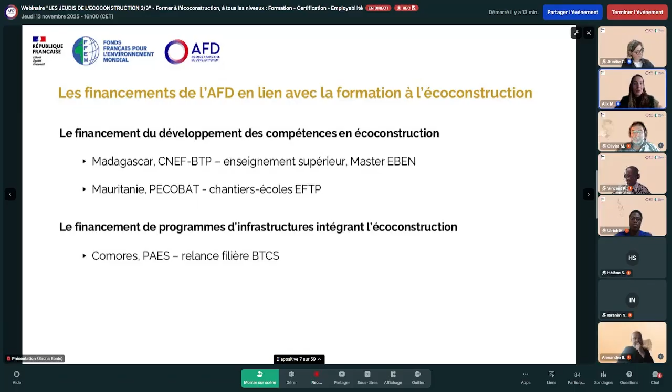Thank you so much, Alexandre, for clarifying AFD's initiatives. It really demonstrates that developing competent skills is essential to entering the employment market. This is the first theme of our roundtable, and we will try to respond to the question: what is the value of green building skills in the job market? To introduce this first session, I'd like to give the floor to Olivier Moles, who can share the French experience and what we can learn from it for other contexts.

Good morning, afternoon, evening, and thank you so much for the interest you have in this field and for inviting us on. For the last 46 years, the CRAterre Association has been working in tight collaboration with various research labs on sustainable building techniques by promoting earthen building techniques.

We've been developing sustainable building styles that are adaptable and valuable for climate change. We've been developing the techniques, training in them at every level, and also looking at developing the capacity to scientifically prove the value of this knowledge and then promote it to various actors in the sector.

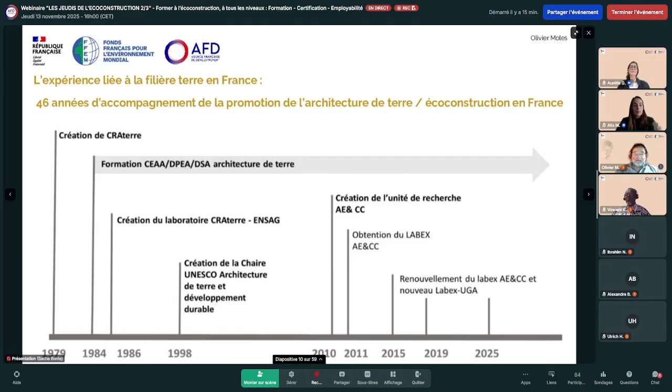So local architecture, and what's advantageous about local materials, is that it is knowledge that's actually the property of the local population. Those of us who have university degrees need to really adapt a learner's mind to these practices. Once we've learned about these techniques, we can think about how they might be used or reinterpreted, how complementary they are with new materials and new technology, and how to use the right material, the right knowledge, in the right place.

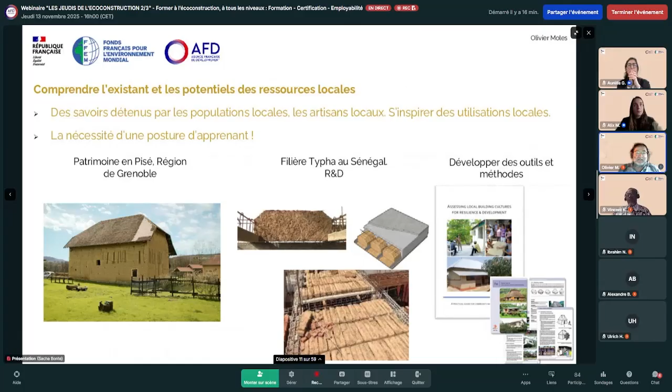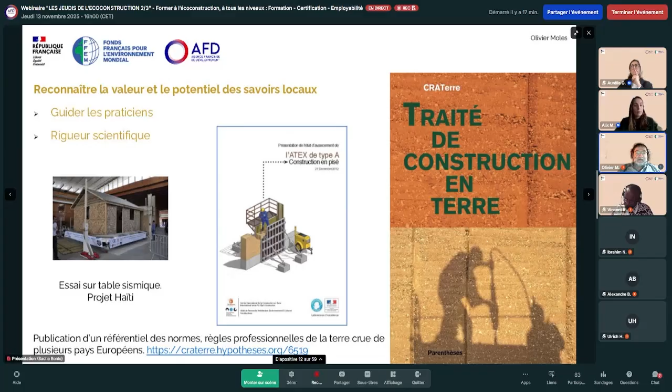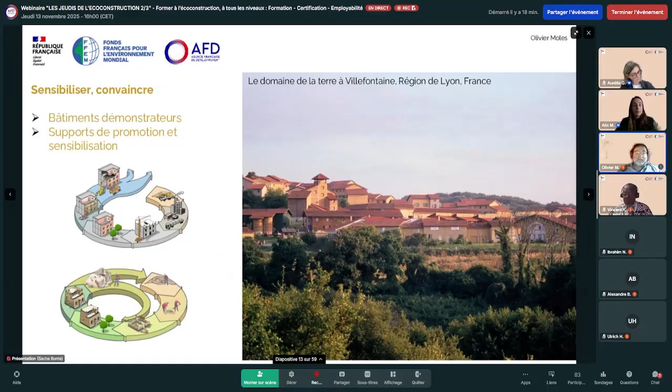So to summarize, we're able to associate research, action, training, and sharing of knowledge. We really support existing heritage, working with local materials and showing the potential of these materials.

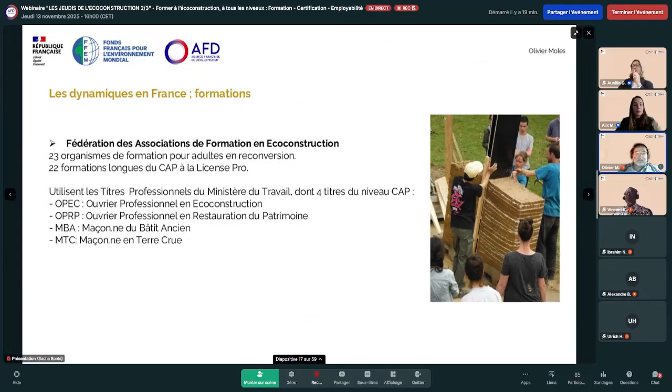Today, there are a lot of resources and trainings available. Many of them are available. We can mention the National Association of Earth Construction Professionals. There's also ASTER and the Federation of Training Associations in Eco-Construction, which are licensed to provide training in the sector.

More recently, in just the last couple of years, we have participated in the implementation of ECOVET, a skills center which allows for providing training and on-site activities, leading to the certification Acquis Terre, which is recognized by 11 countries in the European Union. There are 9 learning units covering load bearing and covering of walls, with European certification levels from 2 to 5, and indicators that allow for a person's skills to be appreciated.

And this kind of approach might be useful for countries in West Africa, which facilitates mobility of students from one country to another to benefit from this knowledge and training.

You give the floor back to Alix, who thanks Olivier for a very in-depth presentation introducing these various professions based on European certification. But we'd like to continue now with the role of building managers, who have an important role to play in eco-construction in Europe and in sub-Saharan Africa. So it's a pleasure now to give the floor to Hélène Sapetier-Aconor, working with ADEME.

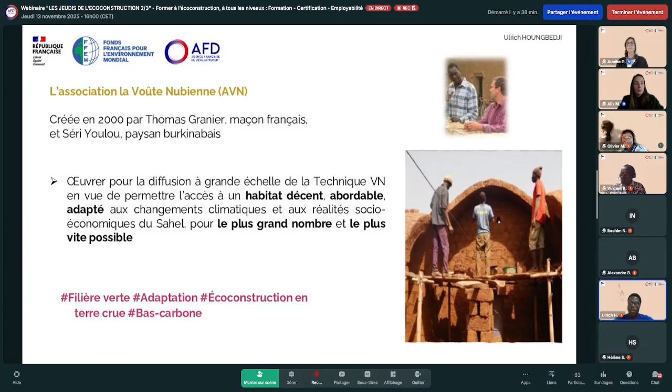And who have worked on many workplaces, we want to popularize the Nubian Vault Association building techniques without iron and many other materials that are not really needed for this Nubian Vault architecture and construction. We also popularize our techniques in the rural areas who have some needs and who are confronted with the impact of climate change, as a way of contributing to reducing or mitigating the various impacts of climate change.

We are in 7 countries: Burkina Faso, Mali, Senegal, Côte d'Ivoire, and Mauritania, where we have technical partners, and we intend to go beyond that to North Togo, Chad, North Cameroon, and Niger, wherever we feel the need does exist.

In Benin, as it is the Benin experience that I'm presenting here, we intervene in the northern part of Benin, in Atacora, Alibori, and Borgou, through the training and employment of rural youth in eco-construction trades. These are short trainings because the trainees are farmers and illiterate youth who already have a job and want to improve their financial situation.

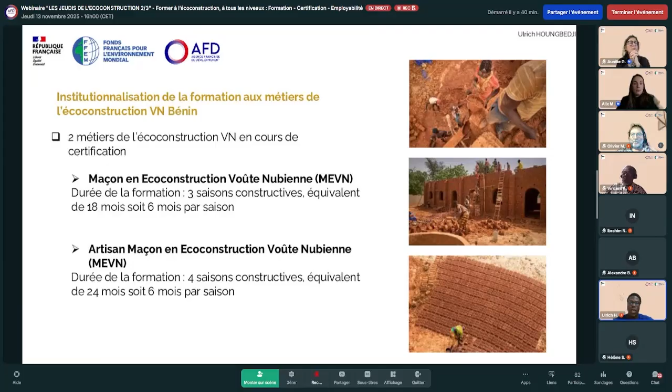These trades or professions are being formalized or institutionalized in order to abide by the norms and standards of the government, in the French-speaking area. We have the support of the government to develop documents that can allow for the training, and we have a skill reference framework or training reference framework, assessment reference framework, and teaching guide. All this gives the pedagogical framework and assessment framework for the training.

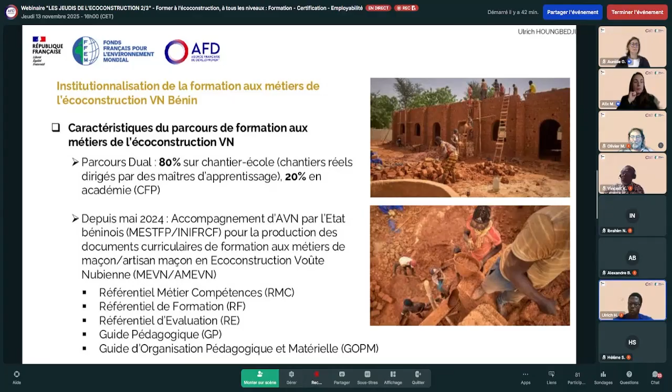It is a dual program: 80% on-site training on real construction sites supervised by master craftsmen, and 20% in vocational training schools, through some school settings that have been created in the area.

Now, 2 types of certifications are provided. What we call certification by VAE, where you need to have the level of a certificate of professional qualifications, for those learners who are illiterate. We also have another certification, professional qualification, to avoid language becoming a barrier.

We have this kind of module. We also have a higher certification by accreditation by the CQP, and this training can be pursued through collaboration with vocational training schools.

We do apologize, and perhaps we need to conclude and come back in the Q&A session. Yes, I was saying that these trainings are provided by the vocational training schools in collaboration with artisan masonry associations. And yes, that's about it.

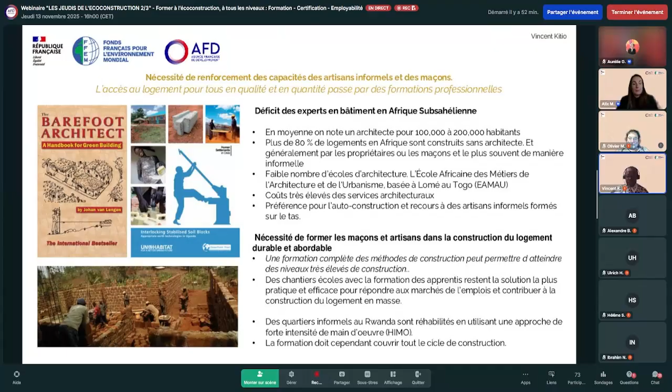As an example, the Switzerland Cooperation funded a project in Rwanda to promote employment through construction, climate-friendly construction based on value chains with low carbon material. The design of the building is done together with occupying owners, and the youth are trained in the techniques.

We can see some informal neighborhoods being transformed into modern neighborhoods, and most of the youth who have been trained can build housing for a greater number of people. In doing so, we believe that not only is this value for money, it is sustainable because it adheres to climate standards.

We believe that these are solutions to be promoted. It is therefore a project that is seen as very interesting by many African countries because it does involve youth in the projects, and it also creates employment and affordable, ecological, low carbon housing. I think I will stop here for the time being.

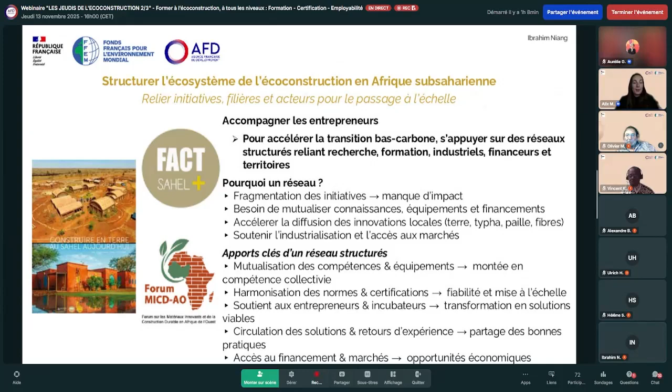Thank you so much, Ibrahim. We can see that this creation of networks is essential to support the sharing of knowledge and best practices. And it's also important to have teaching networks that are adapted to circumstances.

And now we'll have Hélène say a couple of words on the topic. Indeed, what's really important about training is to build up local ecosystems of local skills for designing and building and creating eco-durable buildings. We need specific knowledge about local materials, energy efficiency, bioclimatic habitat. So it's very, very important to have varied and complementary educational resources that can meet these needs. A few examples we have here very classically.

I presented a brief guide that we'll make available to you, which is really a toolbox in 3 parts: one part on notions of bioclimatic building and what's going on in various regions of the world, and one part on case studies of exemplary buildings. The three communicate amongst themselves, so it's a very useful document that I would hope to present to you.

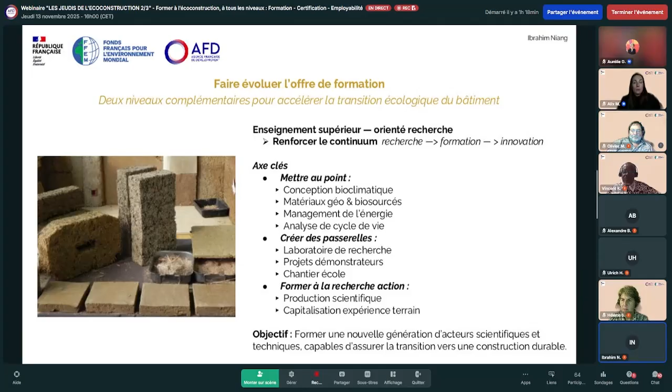The second level is technical and professional training. This is really on-the-ground training. The idea is to train actors for the techniques in question.

There will be building supervisors who might be concerned about who's trained. For instance, there have been schools developed to train students who already have skills in stonemasonry, electricity, or other building trades, and then orient their skills toward specifically eco-construction techniques.

In addition, we hope to develop collaborations with local funders, local structures, government structures, and so on. Afterwards, students will be able to promote low-tech solutions to local issues. This is an approach to training that has really shown its results, and I think we can adapt it. Thank you.

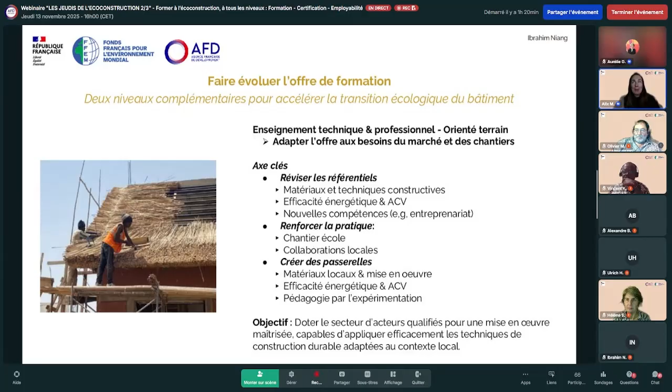There's a question addressed to Olivier in the chat. Can you hear me? Yes, I did look at the exchanges and questions, and perhaps we can also allow some comments. There's a question about a link between the recycling sector and eco-construction, because when you recycle waste, this could be a raw material for eco-construction. Do you handle this kind of aspect of recycling? This is a very interesting comment.

There's also a question regarding individuals who want to build - can they have some training if they want to build their own house based on eco-construction techniques? There are also some requests for resources and documentation, and I'm sure our colleagues and speakers will share documents and resources, specifically the document entitled the Treaty on Eco-Construction.